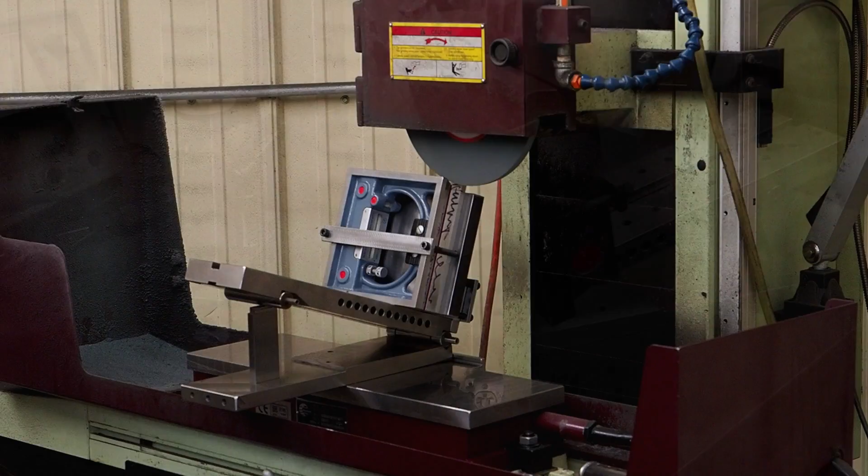Hello everyone, we're back. We're going to be grinding some more on Keith Rucker's column square. This time we're going to do the V's. This will be the tricky part and the harder part.

And before we go there, one of the subscribers, Emerald Machinist I believe it was, asked about the math, how I figured on squaring this block. When we first started with the block, it was out a total indicator reading of about 3 8/10, if I remember right, something like that, out of square. So I'll show the math, and I'm going to use different numbers so that it's easier.

So what we have is a square block, and if you measure from one side to the other, it's out a total of 4 thousandths. That means it's out of square per side 2 thousandths, because you'd split that in half. It's 4 total indicator reading, meaning 2 per side.

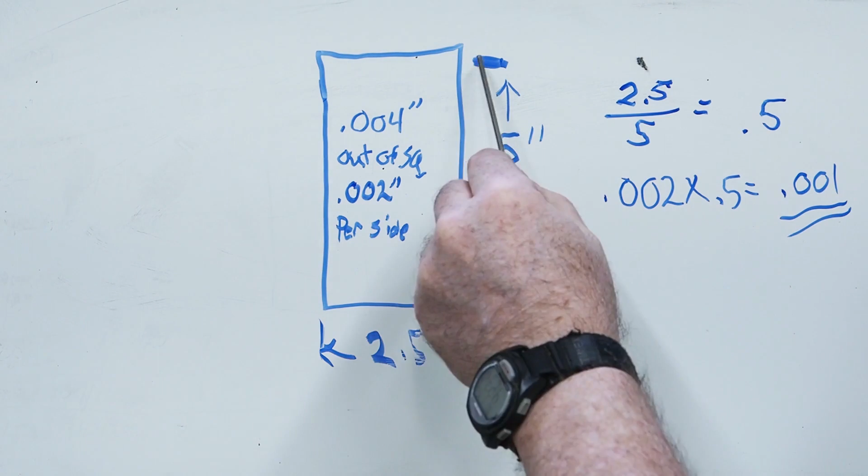What I was measuring was, here's the contact point of the nose radius on the square gauge. Here's the indicator tip, where the distance between the nose and the indicator tip is 5 inches. I'm just using these numbers because they're easier to understand. So even though the block is bigger, we're measuring in 5 inches, and in the 5 inches it's out 2 thousandths per side. Well, the base of this block is 2.5 inches.

So what we need to do is find a ratio. We already know how far out of square. But when we grind a step in here for a shim, how much do we grind off to make a step so that it's square? If your block is leaning this way, it's high on this side, so you need to grind a step over here and cut down, and that way your block can lean back over here. If it's out of square in the other direction, you just put the step the opposite way.

So basically, we want to find the ratio between this side and that side. If I'm 2 thousandths out here to here, I'm not going to be 2 thousandths out here, because this number is not 5 inches. It's half of it. So if I take 2.5, the smaller side, over 5, that equals 0.5. And if I know I'm out 2 thousandths per side, I can take 2 thousandths times the 0.5, and that will equal 1 thousandth.

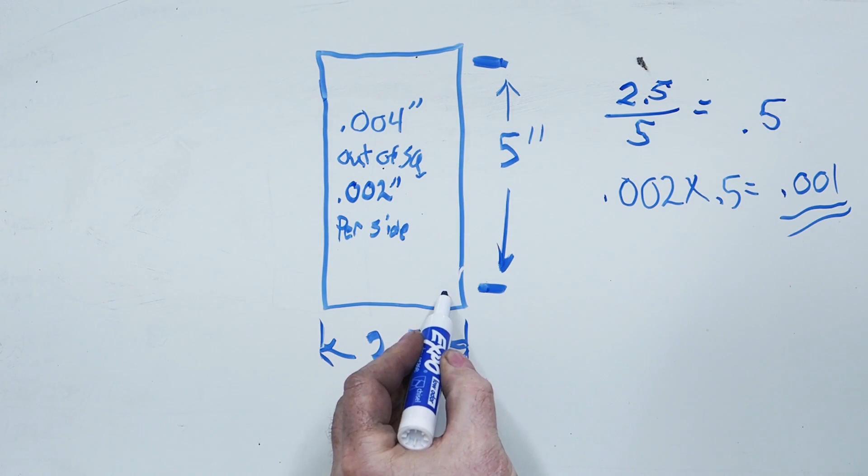So that means I will have to grind a step in this block, and the step amount from here to here would be 1 thousandth of an inch. That would let this block lean back over the 2 thousandths in that 5 inches. And doing the math like this, I can get really close.

Sometimes you have to tweak it in. Sometimes you get really close and it's just not quite there, and you might only have a tenth or two. That's just a matter of setting it up, putting a Dykem mark on there and taking a blank pass on the one side, because you're talking less than 50 millionths sometimes just to get that to move a tenth or two.

And I think it was Brian Block that wrote in the comments that I made this look easy. Well, in actuality, this block was easy because everything just fell in place, and that's unusual. Usually it doesn't do that. I usually have Uncle Murphy visit me, and he makes things difficult.

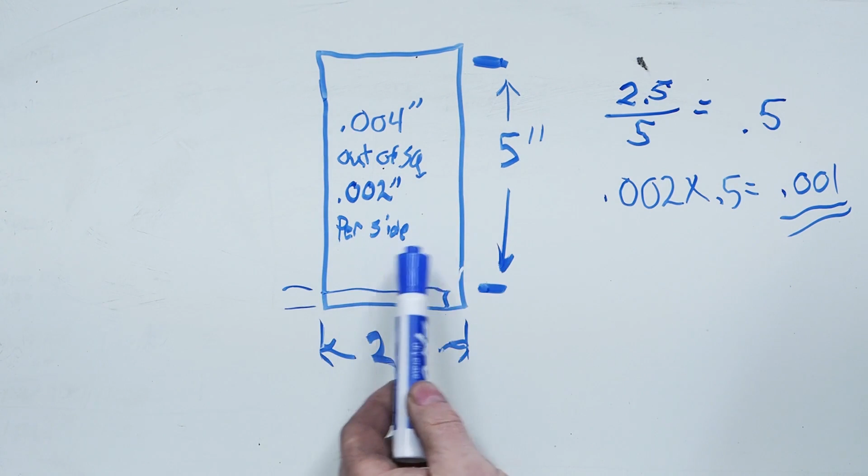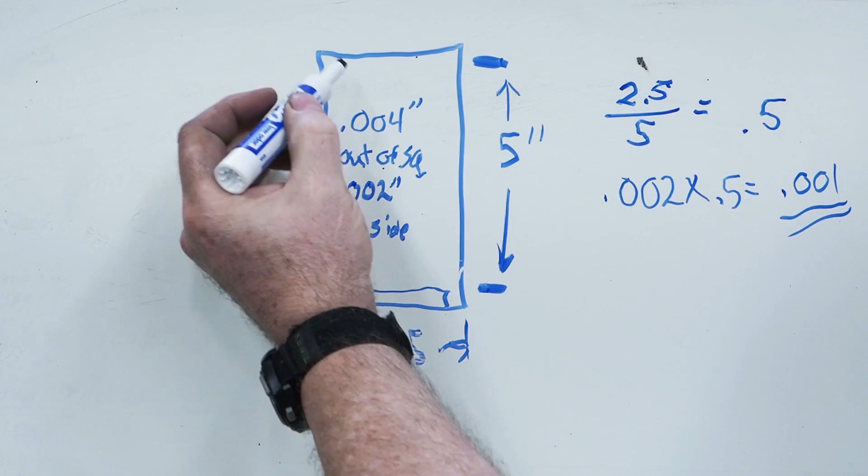For the example I scaled 5 inches, but the block we were measuring from here to here was actually 1.575 inches. I'll just draw it at the top, but we had the V in the block, and even though it was 1.575 in this direction, I had a little flat here and a little flat here, so in reality my step number would have been by the V's if I had been more accurate.

Well, the math I did at the 1.575 came out to where I'd have to grind one side 5.5 ten-thousandths of an inch lower than the other side. That's the way the math worked out, and I only went about 4 to 4.5, and the reason it worked out perfect was because instead of 1.575, I was actually measuring from this edge to that edge, which would have been a smaller number.

And so by chance, it just worked out. The first try, it hit it just about right on the money. So doing the math, you can get really close to what you need when you want to square up a block this way. And what we're going to do, we're going to grind the V's now.

And we're going to use the same wheel. It's a green silicon carbide wheel. It's a Radiac wheel. This one they made that I asked them if they'd make a porous one for me. It's 60 grit. I wanted the porous because I wanted a cool cut on it.

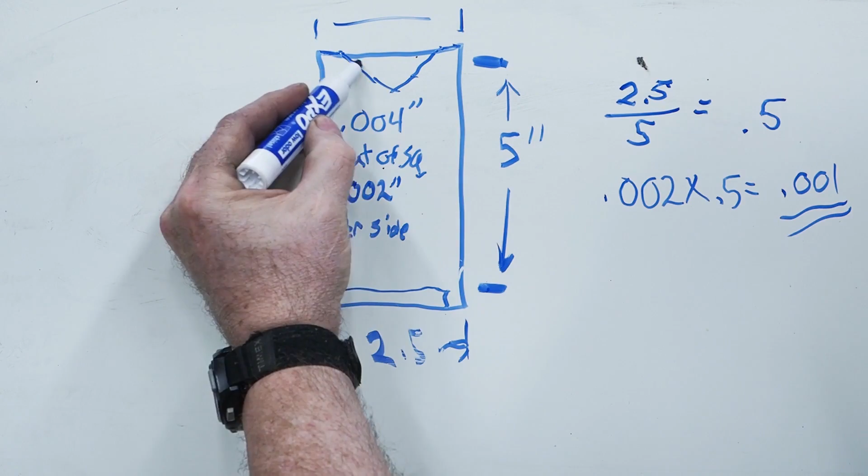And the problem that we're going to have when we have this kicked over and we're grinding this V, if I use the entire width of the wheel, once I turn this up, the wheel would be in like this. If I use the entire width of that wheel, I'm going to have a huge heat signature. If I would come in from this way and grind in, what's going to happen? My wheel's going to wear down right over here, so the V will be near impossible to get flat.

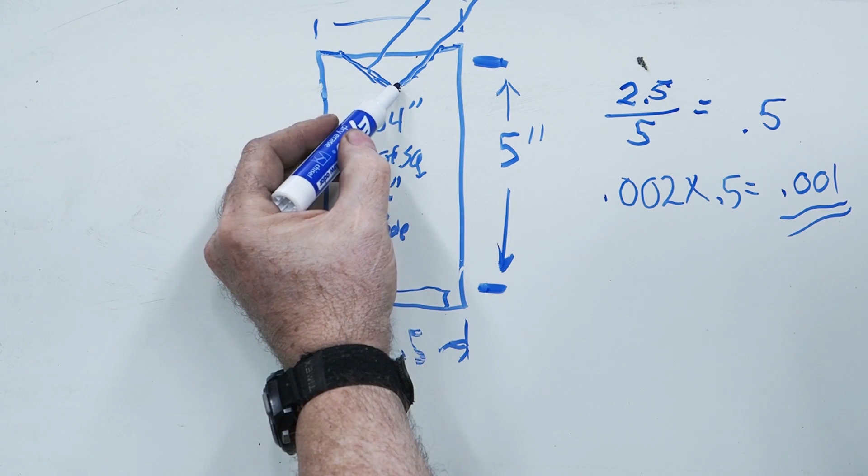So I'd like to come in, plunge down, and walk out. By doing so, my wear is this way, but I can come all the way off, and so the lowest point of the wheel is from the bottom all the way to the top. The problem I'm going to have with that half-inch thick wheel, again, we got a huge heat signature there. And not only that, I can't angle this on the magnet like I've done the other to make the engagement less, because I'd be hitting into these other sides.

So what we're going to do with the wheel, we're going to do a little trick. If you have your wheel, I'll just draw it so it's like this. And instead of using the full half-inch to grind that V, and let's say that we got our V set up like that. What I'm going to do is I'm going to relieve about half of this wheel. I'm going to cut this like so. Oops. Kind of hard to draw like this.

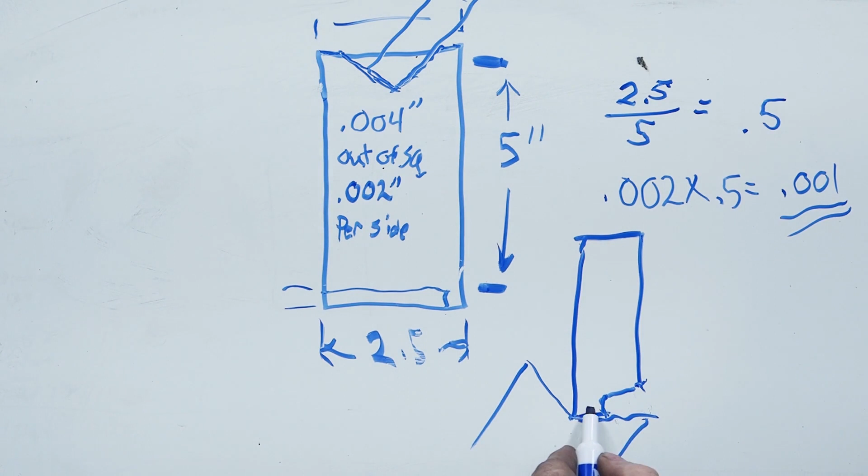So I'm going to relieve this wheel. I'm going to start out with just about half the wheel, or a little bit less. I'll start that way so that my heat signature is going to be way less as I come across. And by taking it easy, it should work out fine. Right now we're going to go to the granite table, and we're going to show you the setup that I'm going to use to grind those V's.

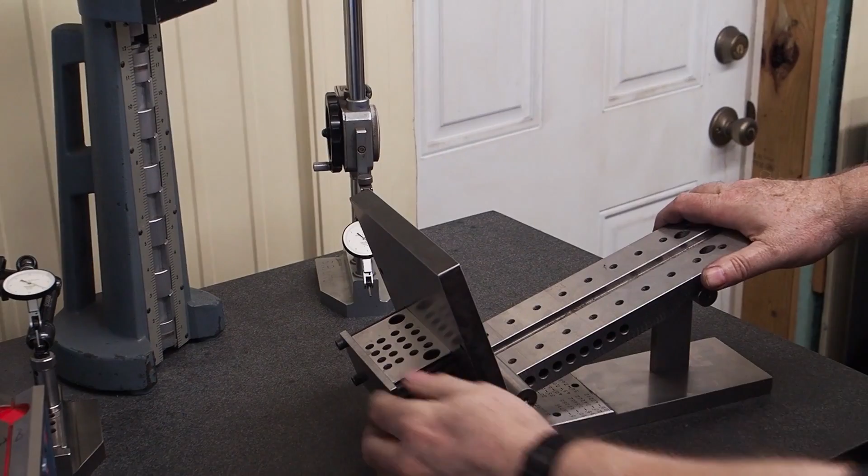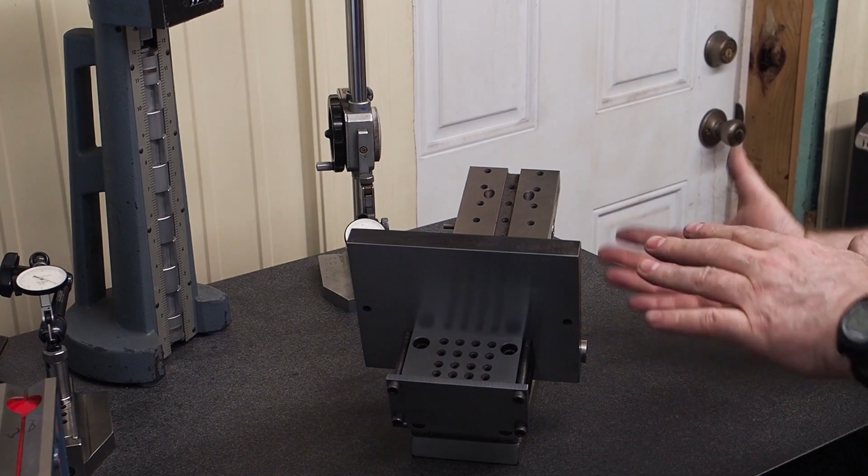Okay, here's the setup that I'm going to use. I'm going to be using this sine plate. It's 10 inches from center to center. I just retouched this not too long ago and got it really good and accurate. The problem that you have when you start working with an angle and you start lifting things up, your error gets magnified sometimes when you're doing this type of work. And so you got to take a couple extra steps if you want that extreme accuracy.

The other thing I had to do was that this base that I have for the sine plate right here, it wasn't going to be big enough. It wasn't long enough. It wasn't tall enough to actually cover most of this right here. And so I could have probably put that on there and tried to toe clamp, but there's no support up here. And then if I start grinding on the V, I can get harmonics because it's just not a rigid setup.

So I took a piece of cold rolled steel and I stress relieved it by throwing it in that oven that we got from Stan at Bar Z. I threw it in there between 1100 and 1200 degrees for about 4 hours, and then the oven would turn off automatically, and then I would just let it set overnight until it was completely cool the next day. So these surfaces, they were milled, but because of the heat and everything, I don't need those surfaces. I just needed it flat here, and this whole plate was flat, less than a 1/10,000th of an inch.

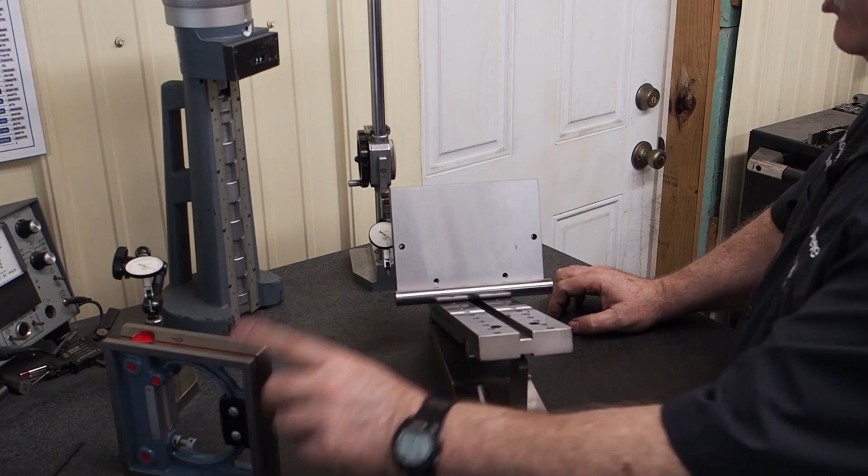The block that I have on the back, when I put just this pin, it's a very precision ground, very round, very true pin. When I would put that in there, it was 2/10 low, checking from one side to the other, which is actually quite accurate in 7 inches.

And so what I did with this plate, I got 4 screws that will hold this plate on to that block, and in the middle I put a jack screw for 1/4-20, and this was the side that was low. So I got the plate snugged on there pretty good, not reefed down real tight, but real nice and snug. And I put a set screw in there.

And then what I did is I adjusted the tension and everything so that I can get this pin so it reads over here. From my angle, it looks like we're reading right at 0. And it looks like we got it right on the money over here. It's at 0. So we eliminated that 2/10,000ths of an error.

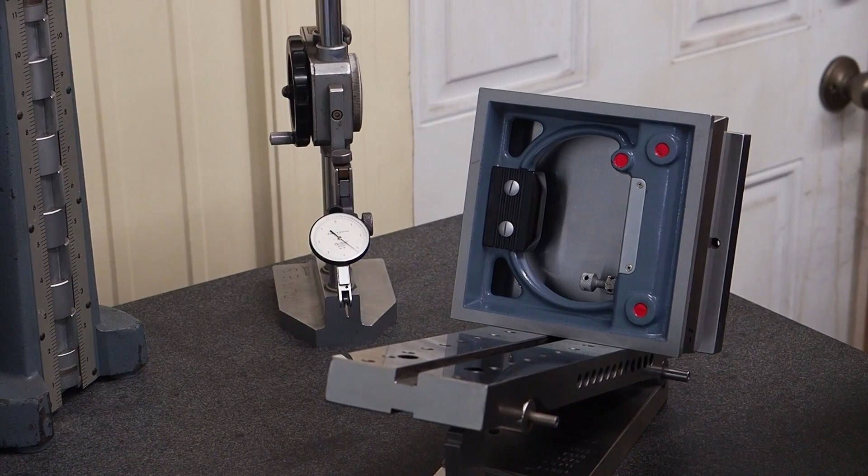And the reason you want to eliminate that is because if you go to grind, you have your part on here, and you're low on this side, 2/10, high over here. When you turn this over, you're going to be low here and high here, just the opposite. And so what will happen is the plane that you're grinding right here is off 2/10. It's just the opposite on the other side, and it will cause some error.

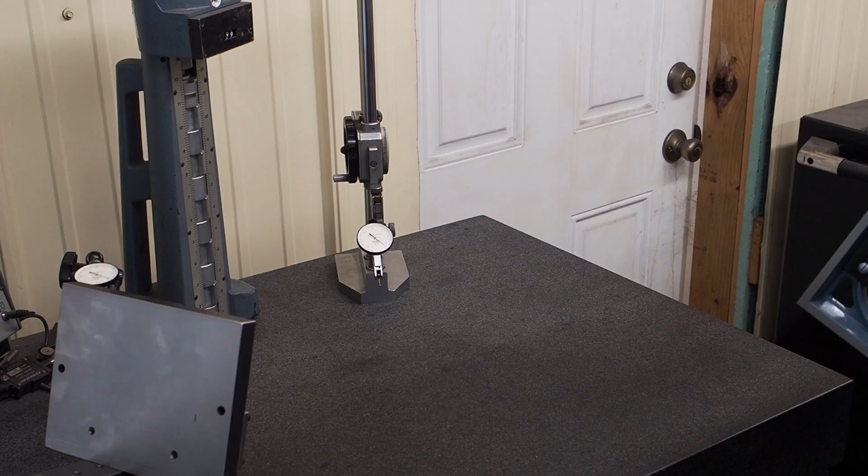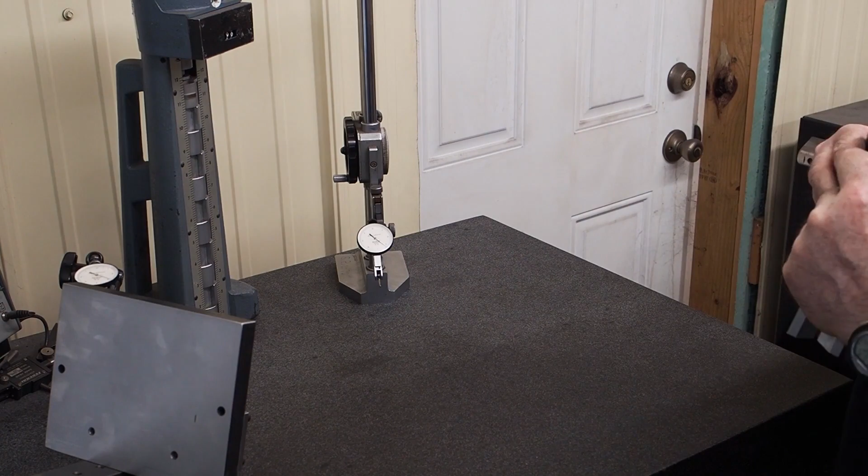And so this is why you want to get that planed in. If you're doing V-blocks or anything with angles, you want to get those 2 planes that you're working from. You want them to line up as best you can get them. Let me see if I can find, yeah, here it is. And I mapped this out a little bit off camera, and I just want to show you guys some of the error that we have.

And it looks like we got a big old fly visiting us. Might have to take care of him off camera here in a little bit. Photo bombing us.

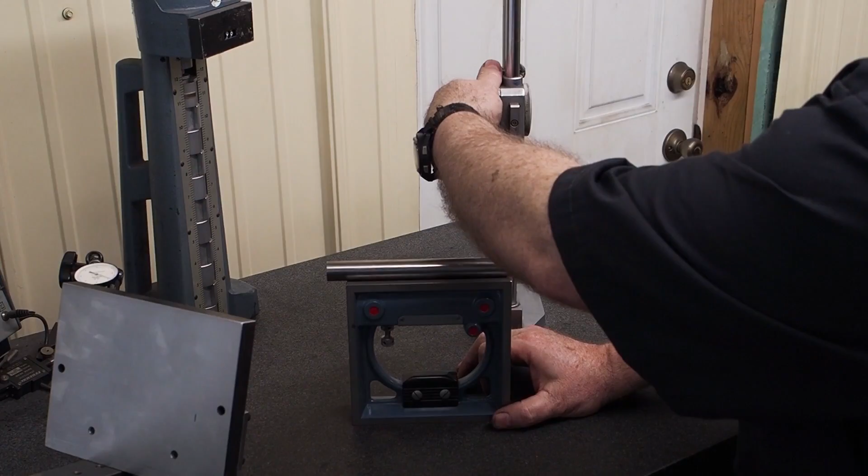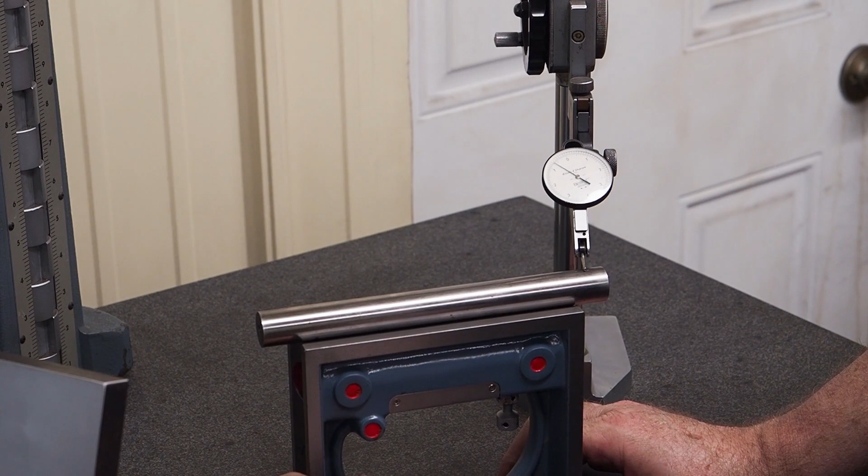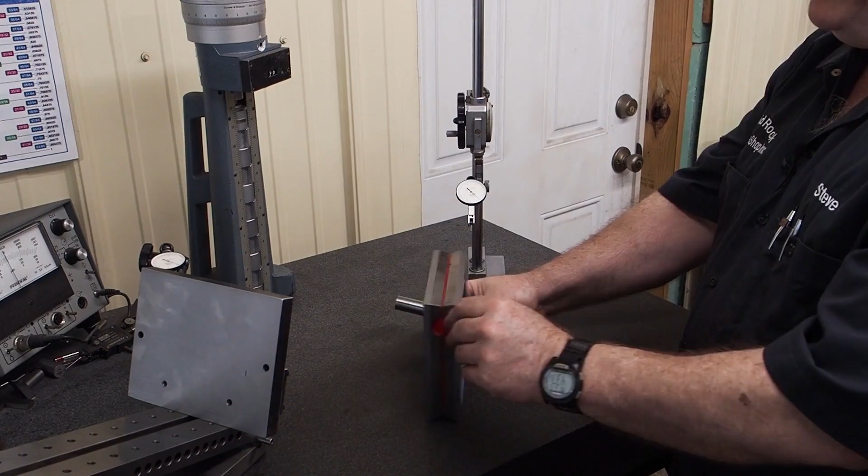If you look at this V, we're right at 0. And we're about 1/10 high. So you're going to think that V is nice and square because it's reading right on. The problem that you'll find is that when I actually map this out, it was the error I was just talking about. From this side to this side's 1/1000th low. From this side to this side, it's 1/1000th low.

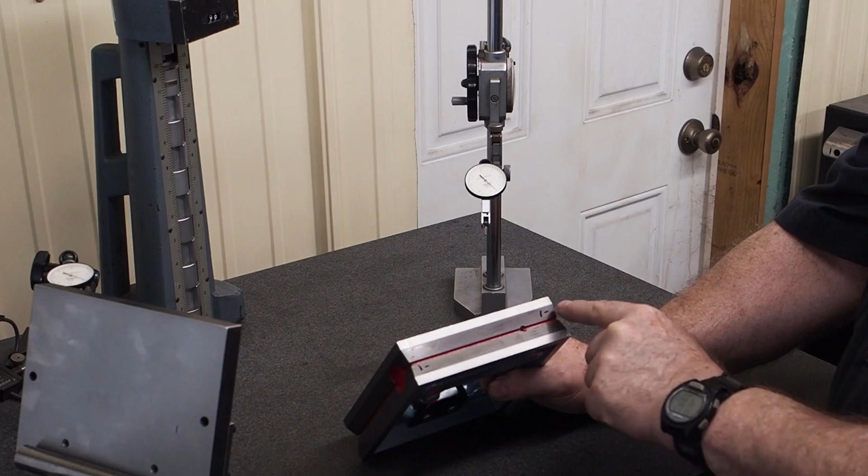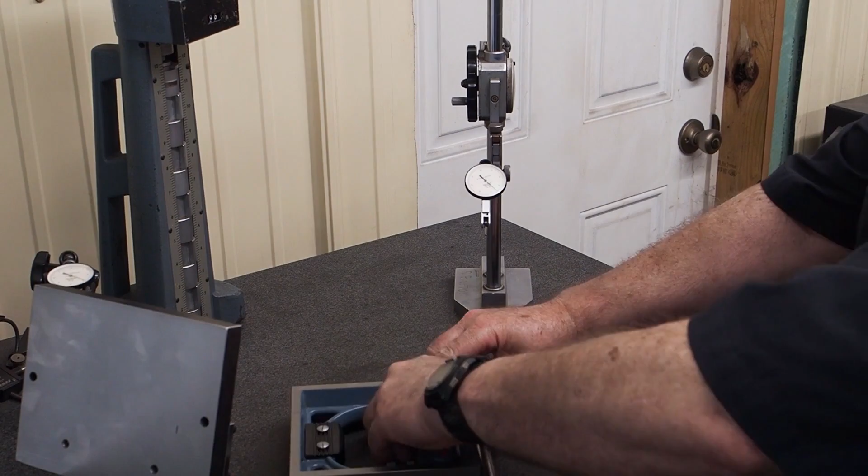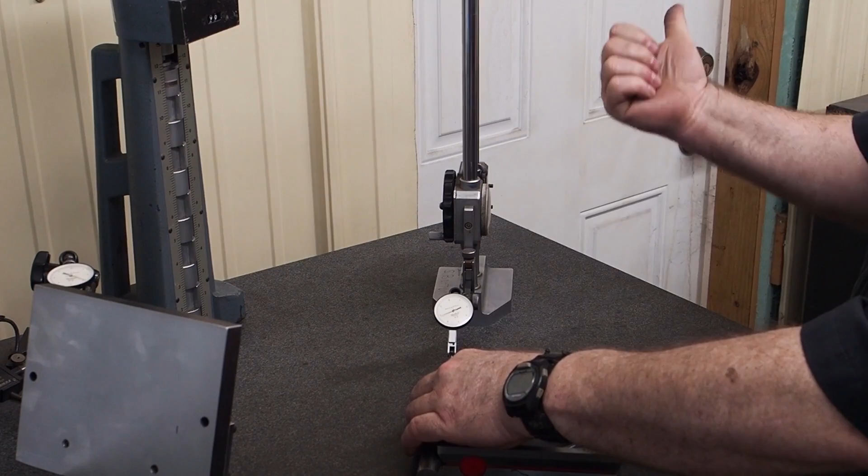And so what will happen, even though it was square in the one direction, if you would set it up in this direction, and let me see if I can do this without getting my hands too much in the way, and it's always kind of hard holding the V like this, so we'll see if we can get a decent reading, or at least one close enough. See if you can slide it while you're set up back that way. Back? Yeah. That's good. Okay. So we'll get position for the camera the best we can.

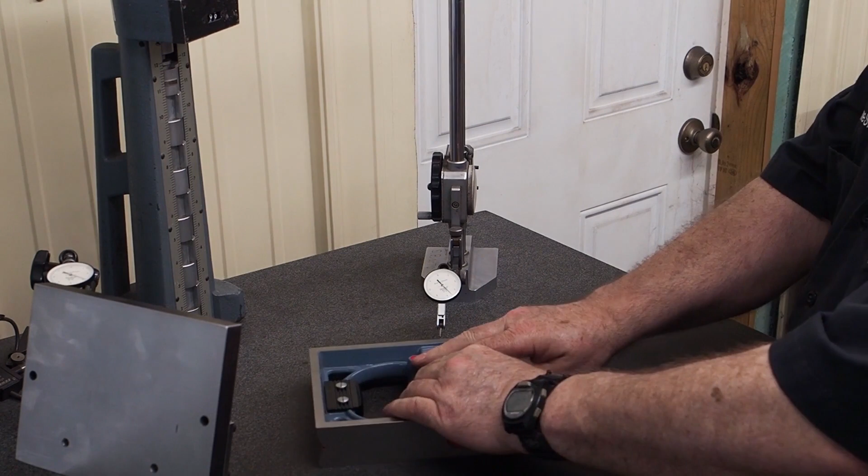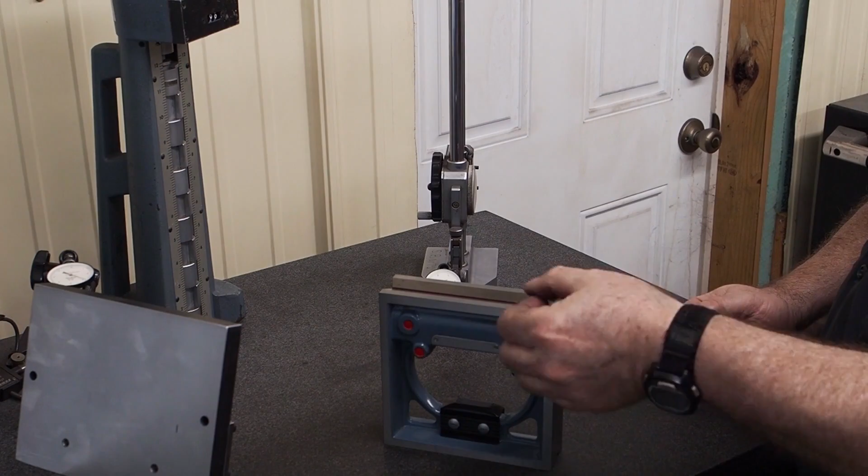So you can see we're about 1/10 high. And now you can see we're about 1.5 out. So it's square in this direction, but those planes are not going the same, and so that can cause all kinds of other problems as well. But it shows that in the one direction it is out. So we want these planes to be as close as we can for accuracy.

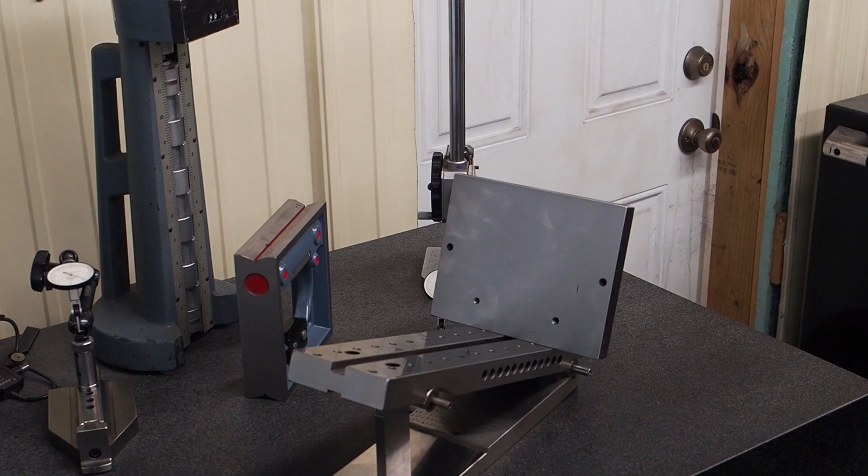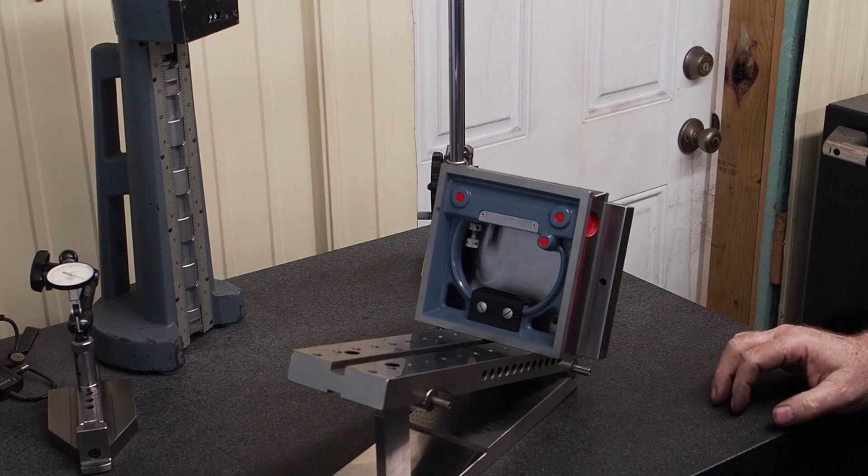Now, the next thing that we have on this is when I set this up to find out what kind of angle we had, I thought it was 15 degrees because I have a 15-degree template. I set it in there, and yeah, that's 15 degrees. It looks pretty good. When I started setting this sine plate up at 15 degrees, I noticed that I was way off when I was measuring in this direction. And you can see I'm off here.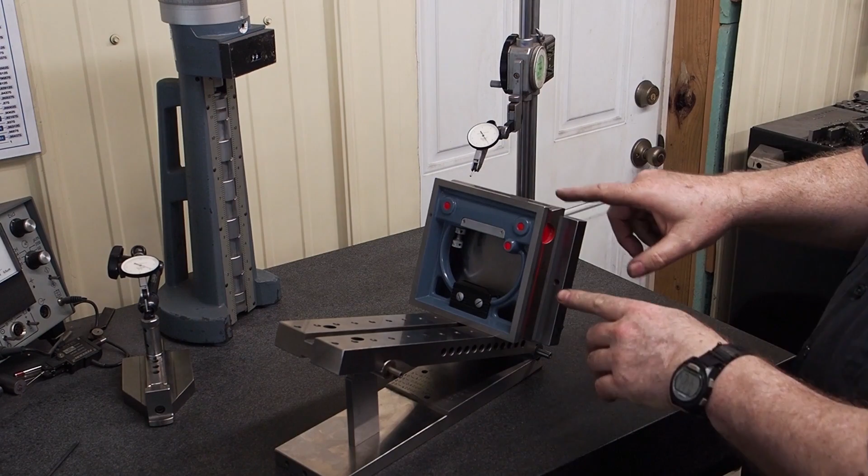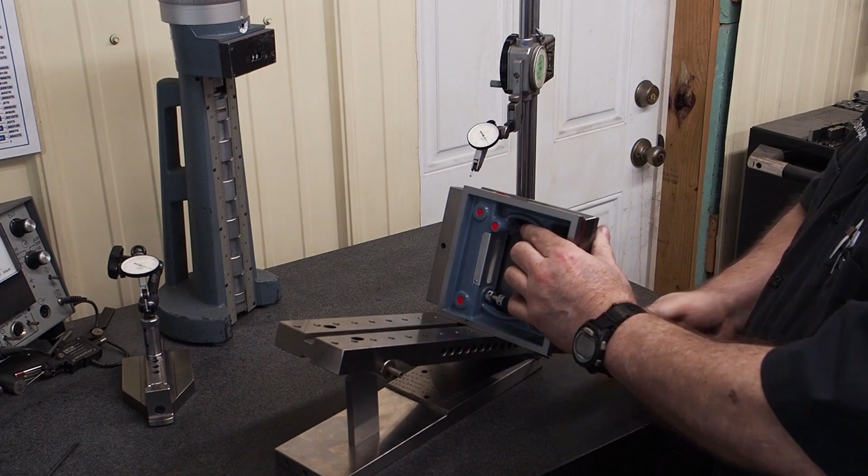But the thing that I found out is that this V was off. None of these V's are the same. They're all off. And they were not 15 degrees. The closest to a nominal degree I could get was 19 degrees. So here you can see this one here is pretty close. It's a little bit higher, but you can see that's pretty good. And that was the V that I figured I'd start working with.

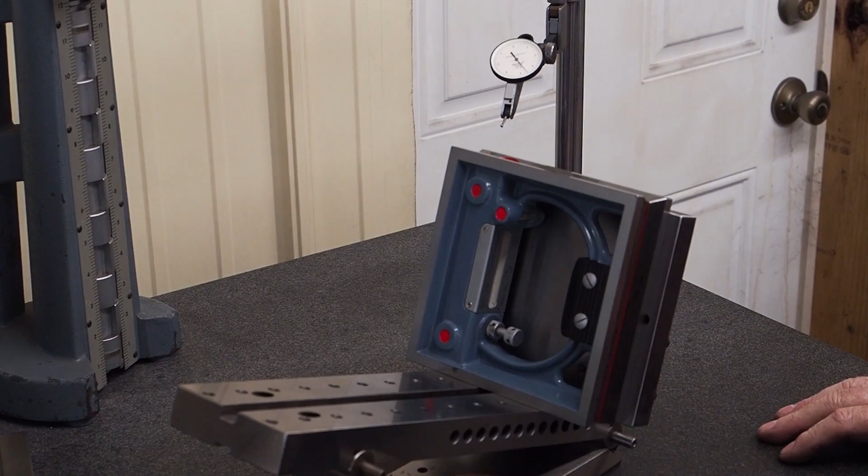So anyhow, what I did is I just kept playing with my gauge blocks until I got the one side very close. The other sides are close, but I think that worst side was what you just saw, about a thou out. It turns out that by doing the math, the actual angle that this is set up on is 18 7/8 degrees.

So I have no idea what the original setup or what it's supposed to be, but I'm just going to copy what they have in here the best I can. And so, Keith, if you want to know what degree that is, write it down. It'll be 18 7/8 degree.

And so what we'll do is I'll get this strapped up. And we got a strap where I can pop this in there and hold this on so we can grind this. I got to change the wheel out. Actually, I got the wheel on. I got to actually get the grinder going and get the wheel dressed and get our setup. And then what we'll do is we'll come back and we'll start our grinding.

Okay, I got this set up right now. You're not going to be able to see the grind because it's going to be blocked. I'm real close. I haven't touched off yet. But what I did is I got to where that relief is in the middle, and I came back as far as I could without touching the other side. And here's the beauty of having a digital on the Y. I set that to 0, so I know where to stop on that. And so right now I just got to lightly touch in, and we'll take our first cut.

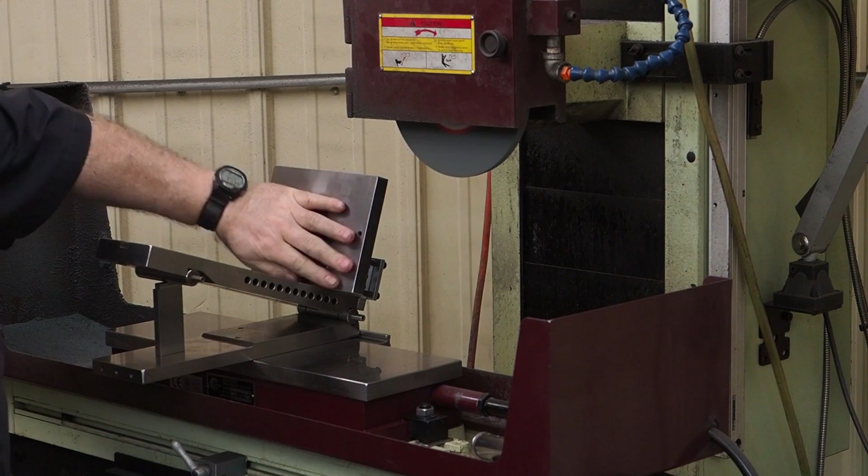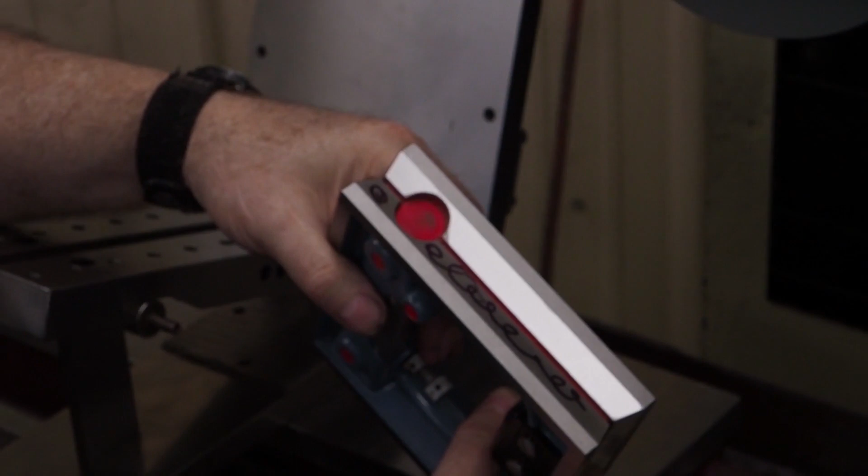What I'm going to do is I'm going to wipe everything down, get all the grit, and if Adam can get up in here, you can see I had it inked up like that, and it only took a couple tenths and it cleaned up. We got a very nice finish. Can you see that from there, Adam? Okay. How's that? It's hard to tell. Okay, well, it's kind of hard to get it with the light here, but you got the idea.

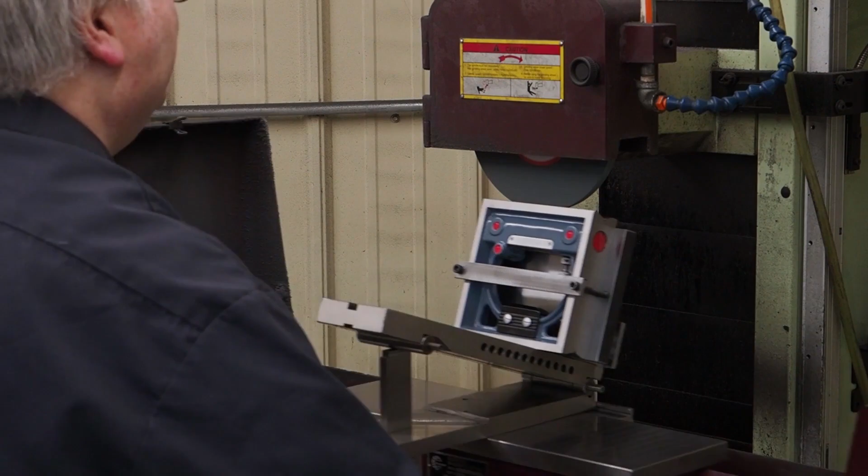Come back to 0 on the Y. I'm just going to ease in because I didn't check to see if that was central, which I'm assuming that it is. Now that's usually when things come back at you, you assume things that aren't right. At my age, I really ought to not assume things. Really should expect actually the worst. In this case, it looked like it worked out. So now I'm going to ease down.

We had one viewer that requested that we show a picture in the picture of me actually winding the handles as well. I know some guys don't like that, but we're going to do that. I think what he wants to see is the actual feed. A lot of times when I'm traversing in the Y, I don't even think about it, and they ask what kind of step over I'm taking. Well, this Y is 100 thousandths per revolution, and I usually try from here to here to go about half or about 1/4 of a crank, so 25 thousandths to 35 thousandths. I'll do that on my finish.

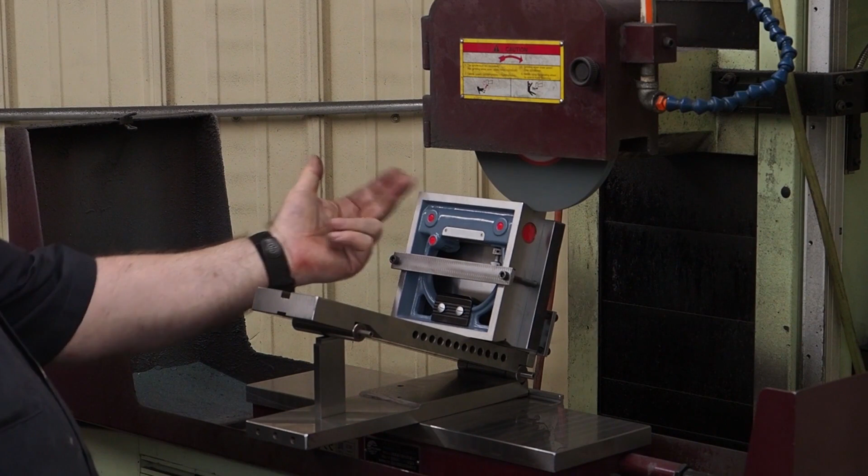And now we're cleaning up, and we're heavy on the one end, and we're low on this side. So I'm not going to bring this V central in there. I could do that, but it's just going to be extra work and extra grind, and I can't see that there would be a reason for that. So we're just going to get them so that both of these planes are winding good.

And going back to the step over, people ask what kind of step over you're taking. A lot of times when I'm flat grinding, I have a continuous movement on the dial. It helps with the finish, but it would equate to 25 to 30 thousandths in per pass on there. But I keep it a continuous movement. A lot of times I get asked these questions, and I got to think about it because I don't even pay attention to what I'm doing. It's automatic.

So we're coming back with a blank pass. And we'll just pull this off after this and check and see where we're at. There we go. Okay, because when I flip this 180, I rotate it 90, so I actually got two of the V's ground right now. And we'll check them out. You can see in this direction, we're right at 0. And here we're less than 1/10, roughly 75 millionths, the best I can tell from my angle. And it's going to be really hard to get closer than that.

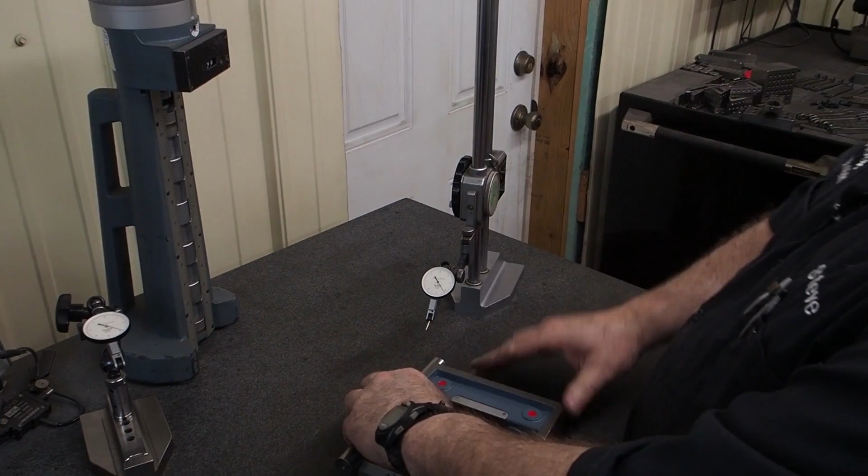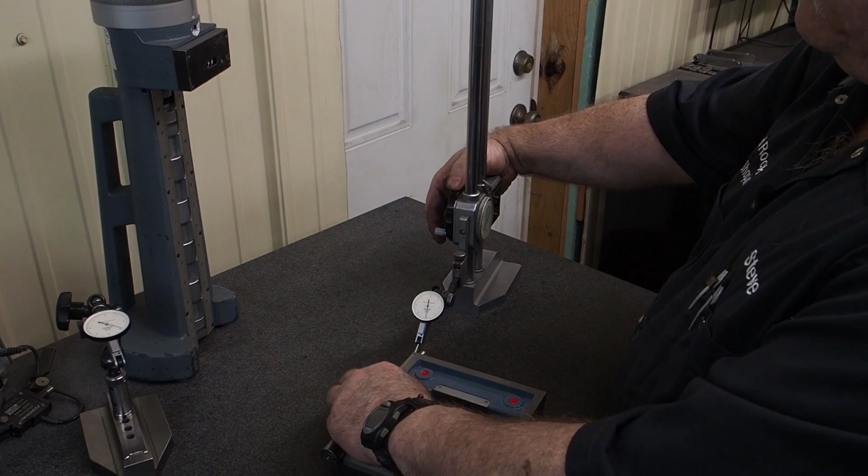The other side was identical. What we're going to do is set this down. I haven't checked this yet. Let's just see how straight it came out in this direction now. If it come out straight in this direction, that means I only have one more side to go, and then it'll be ready to ship to Keith. And see, it's real hard to get this just perfect here. And I'll show you why once we check the side.

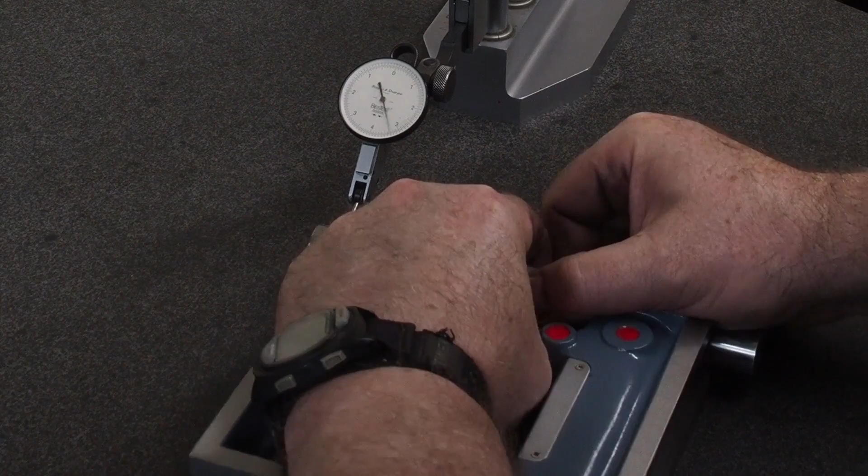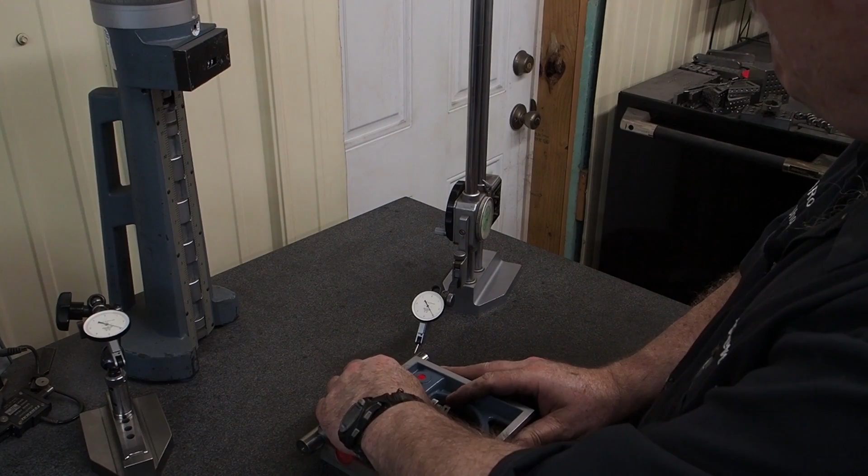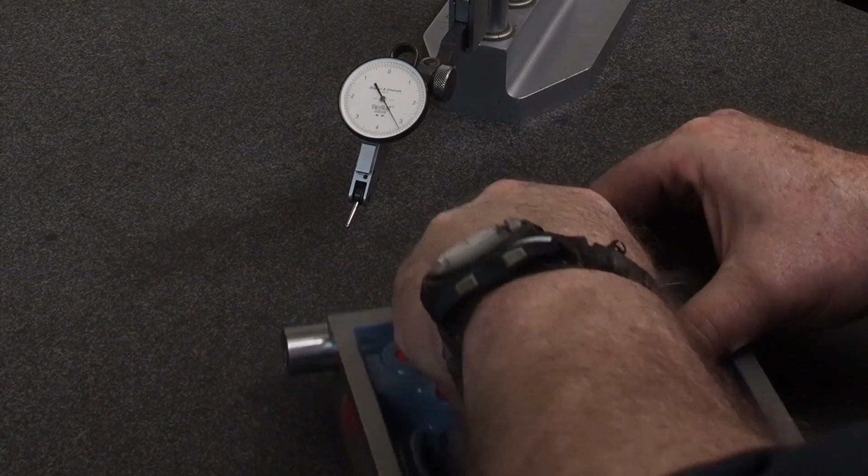So we're at the high point. We're just about 50 millionths high. And it looks like we're almost perfect there. I said I wasn't going to worry about getting these central. I don't see that there'd be a real need for that, just as long as they're square. So we're sitting right at about 0. And this one's off a little bit. This is okay. I'm going to check the other side again, but we're about +4 to 5.

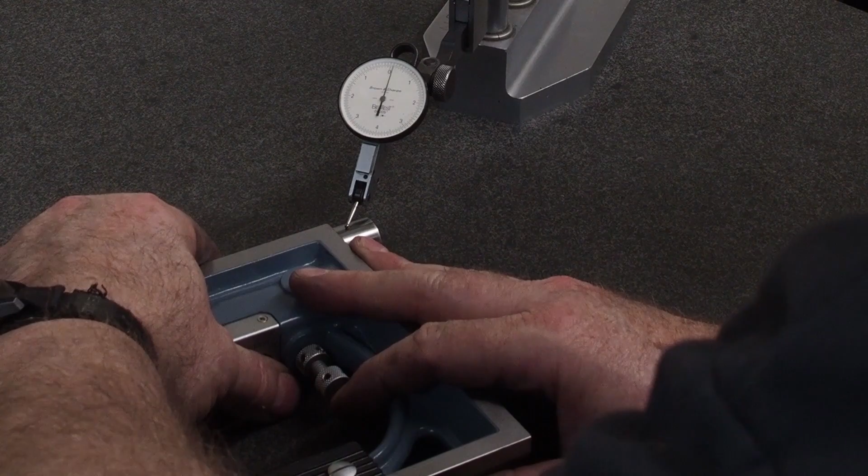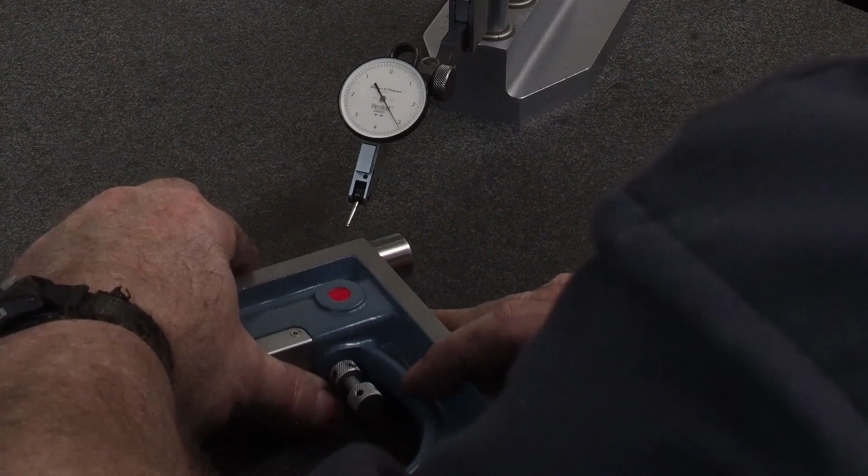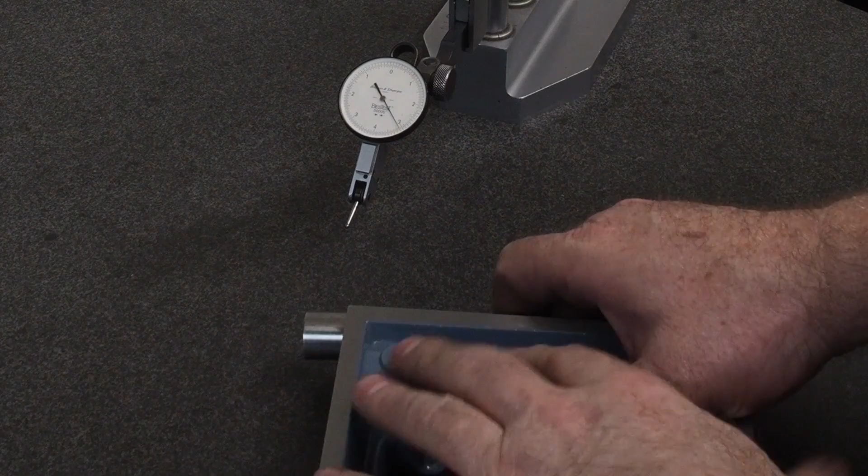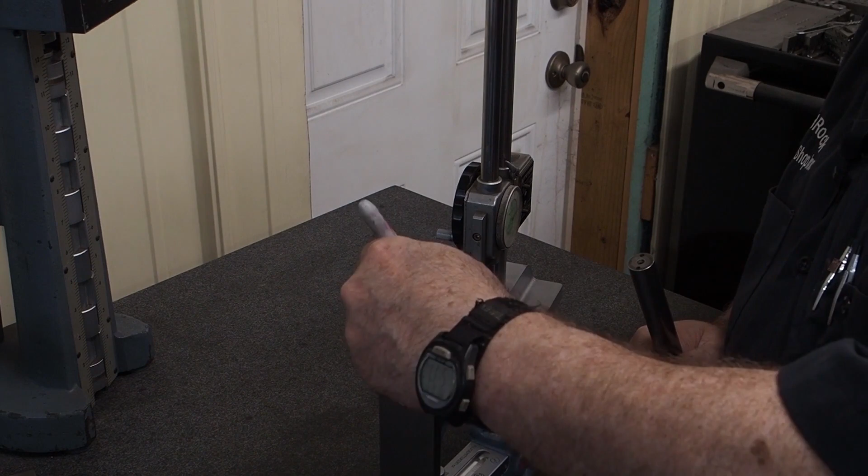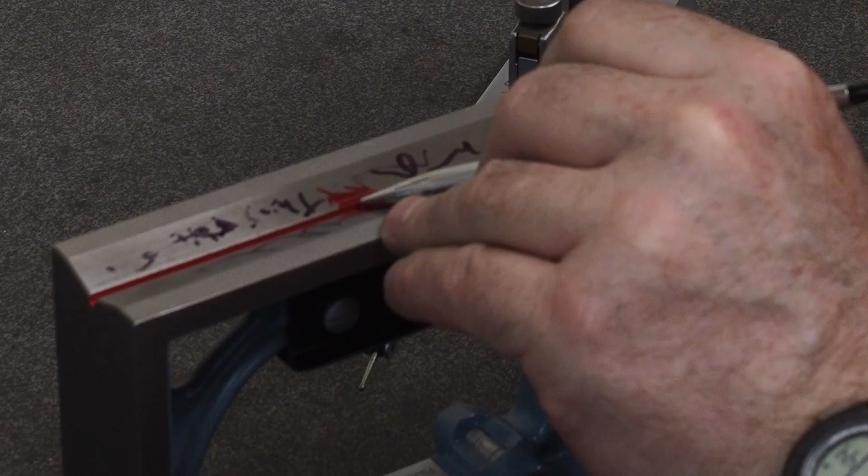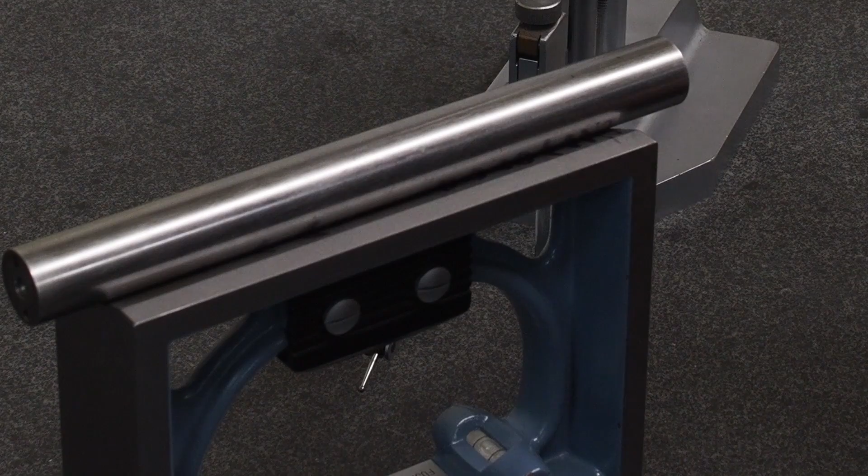Now I don't know if you can see it or not, but our contact on that angle is only less than 1/8 of an inch from this edge up. So we're not checking way up, we're checking pretty close. So it's kind of hard to hold the pin in there with that small of an angle. You got 18 degrees, and at that tangent point, it's really hard to keep that pin from rolling, just holding it by your hands. But it is square, the direction that we want it.

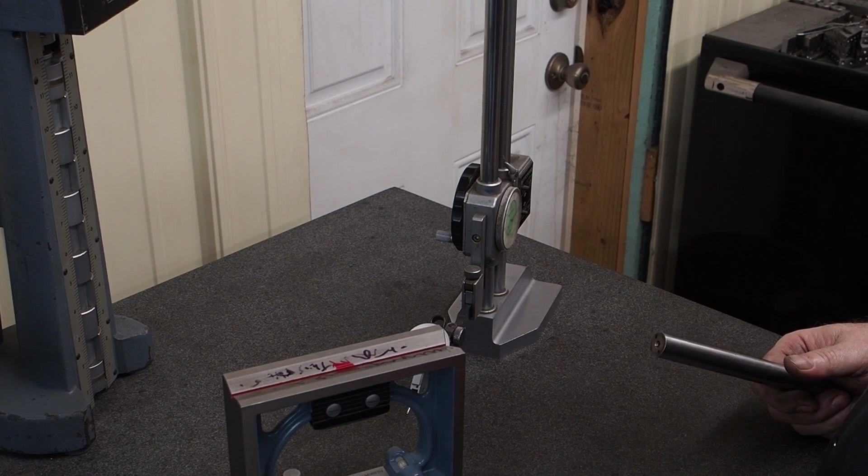It's close enough that way. It's almost perfect on one side, within about 4/10 on the other side. I'm going to grind this third side out, and then we're going to check it, see where it's at from there. And if it checks out and it's as good or better than the worst side there, we're going to call it a keeper.

Grinding your V's and getting them just perfect is really hard to do. You're working in different planes than just a regular top and bottom grind and regular squaring. The angle that you're working in makes a big difference as far as how accurate you can get on these things as well, because like I say, when you turn things up at an angle, everything gets compounded.

And, oops. And I'm not reefing anything down. I'm just getting her down snug enough that I know it's not going to move, because I don't want to distort anything.

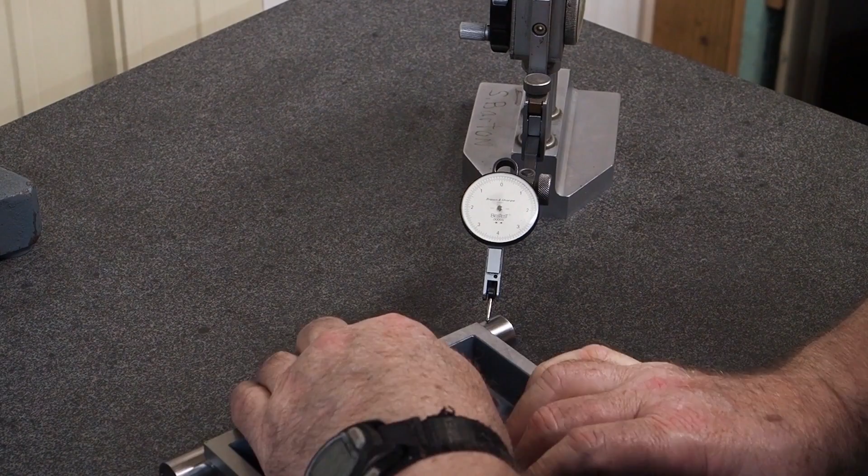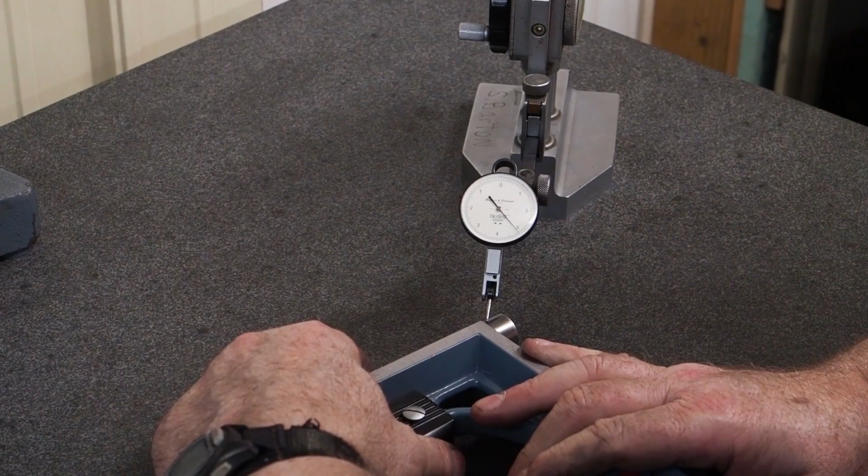Okay, here's the last side that we've ground. And we are setting at +3. And 0. And again, that direction I'm not as concerned about. We were quite a ways out on that. What I'm more concerned about is how square it is going to be this way.

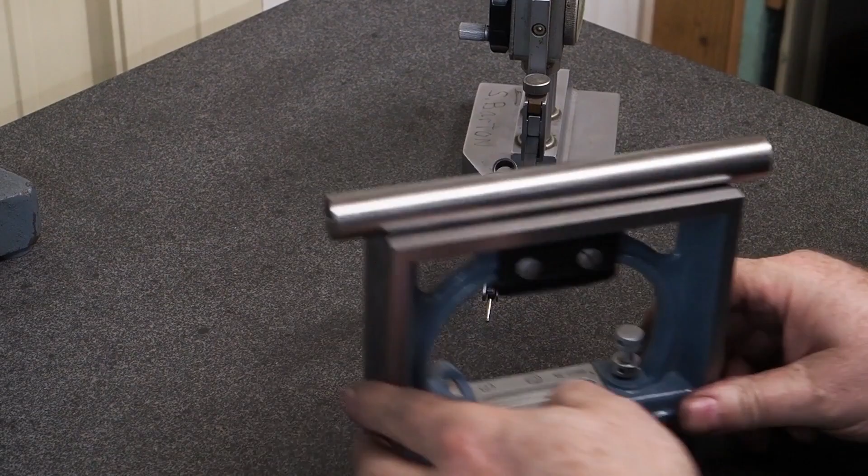Yeah, that 3/10 side to side, that is really hard to get out. You can do it, but you just got to play with it, tweak things in. If you got just the littlest tiny piece of dust or ding on there, it gets magnified when you turn from one side to the other.

So now let's see. Okay, just trying to get it perfect. Yeah, I'm probably not going to get it. It's about minus 25 millionths. And here we're about minus 2.5 tenths. So let's check the other sides out again. We may have to try to touch that one up a little bit.

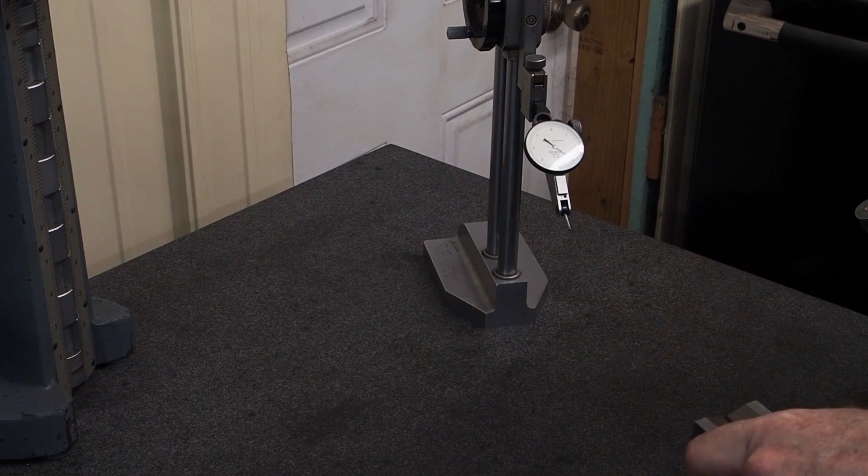And actually, I'll have to check the bar because I probably didn't wipe it down good. I'll have to check that side again. So here we're plus almost 1.5. And now we're within 75 millionths on this side. So this side we're not going to touch. So I'm going to go ahead and mark it.

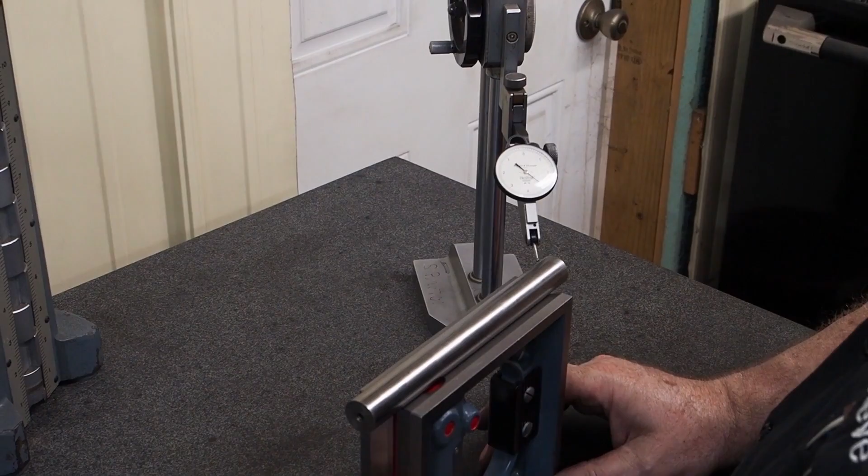And I wasn't trying to bring these to the same size either. I'm just trying to get them cleaned up. There we're at about almost minus 50 millionths. And that is almost identical. I mean, that's about minus 50 millionths. So this side is good.

Now I'm going to flip it back over to the one side that I measured out, because it may have been the fact that maybe I didn't have that bar cleaned off good. I could have had a little grit on the table, a little dust. There's a lot of things that can take place. It could be in the setup.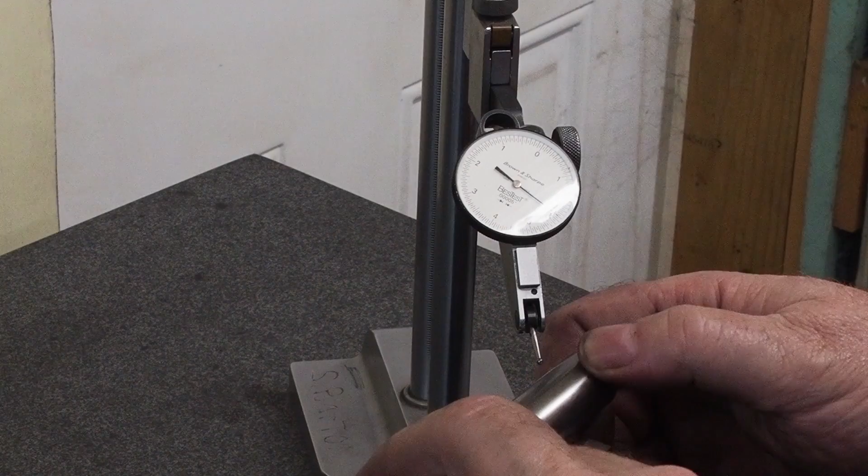But when you're setting this up, you can rub this bar in here like that just to get it to seat good. Kind of roll it and go back and forth, and that way if there's any particles under there, there's a good chance that you'll get them to move out.

We're just about plus 50 millionths. Oh yeah, see we had a little bit of particles in there. Right now it's reading within 50 millionths. So anytime you get a reading that just seems kind of strange and the other sides come out, always go back, clean things off, check it out, because you're probably right on.

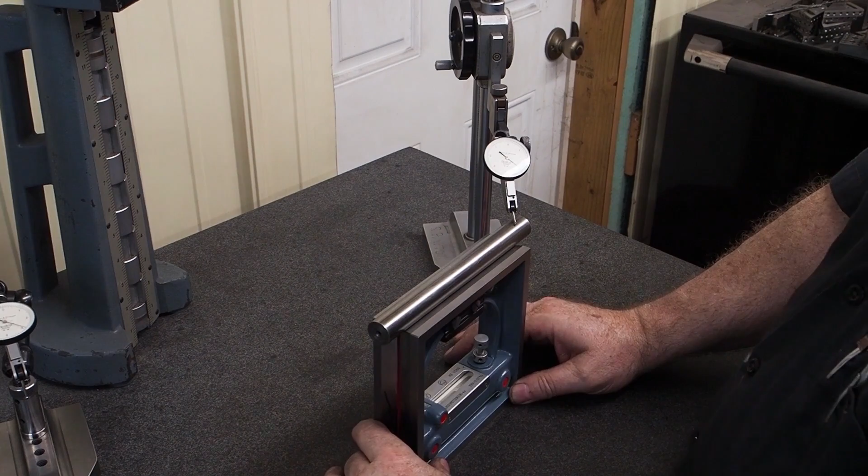And I mean, I could have had a small particle under this surface. I could have had some small particles under that surface. And when you're dealing with V's especially, you're working off the tangent point of this diameter, and you got to roll that. If there's any dust, any speck of particle that's in between that tangent point and your pin, it's going to throw you out.

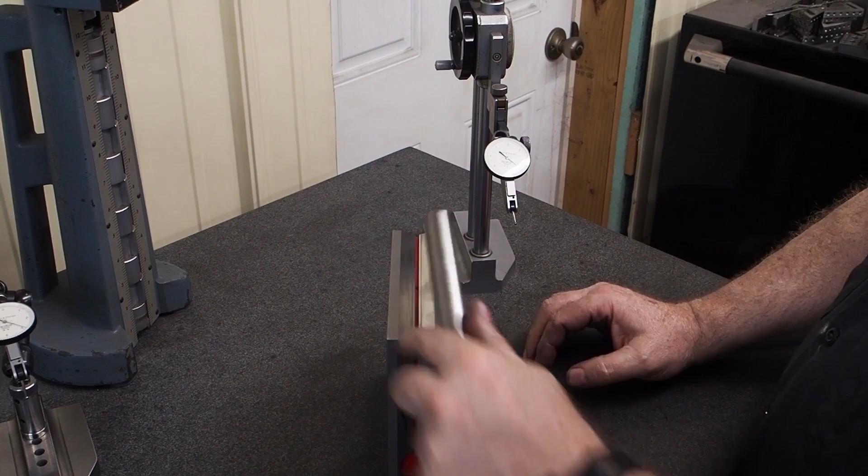So anyways, we're going to call this good. About the farthest out we are on one side is about 4/10 total. And on the other side, I think one was just about right on, and one side was within a couple tenths. But again, that I'm not too concerned about. What I'm concerned about was in this direction here.

And it looks like Keith now has an extremely fine-tuned column square. It's probably one of the most accurate ones in the country. And this level here is adjustable. I'm going to let him take care of getting that adjusted the way he wants. He's more skilled at that than I am.

But this is just a really nice tool. And what a generous gift that one of his subscribers made to him. I mean, that was awesome. And I don't know what something like this would cost, but I can see in Keith's line of work where this thing would come in so handy. It'd be a great tool to have.

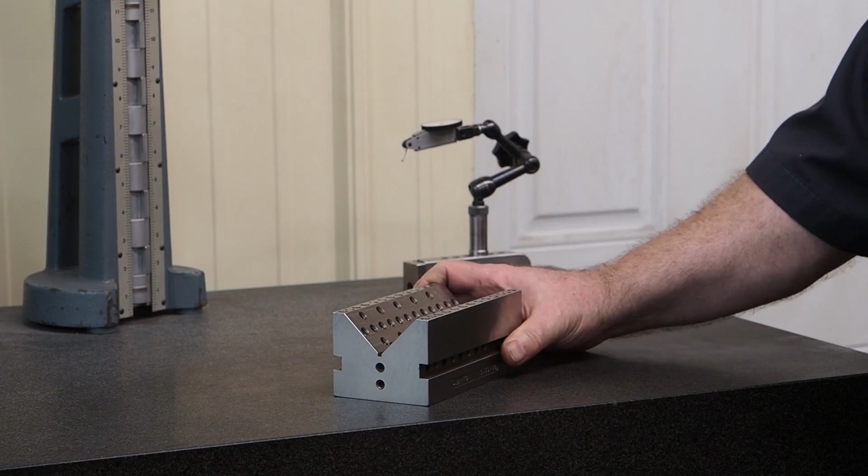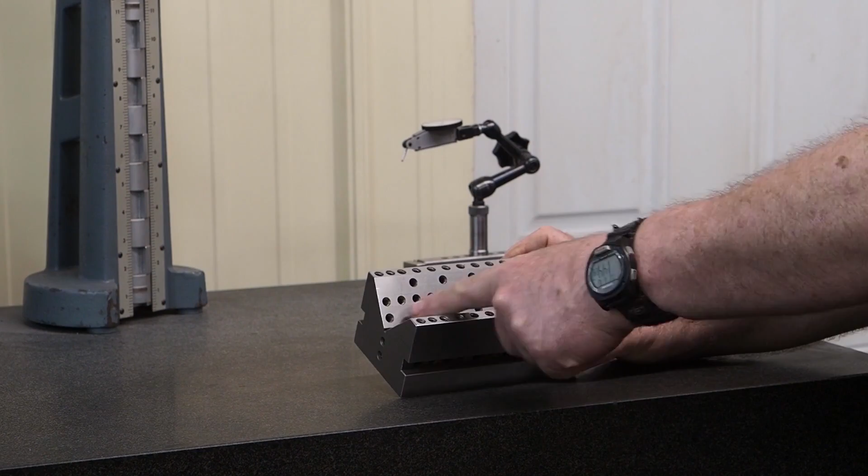This is a V-block that I've made years ago. It's my favorite V-block. This one is extremely accurate. But it has holes in the V area. It has four tapped holes in here for strapping. You got a couple tapped holes here for stops.

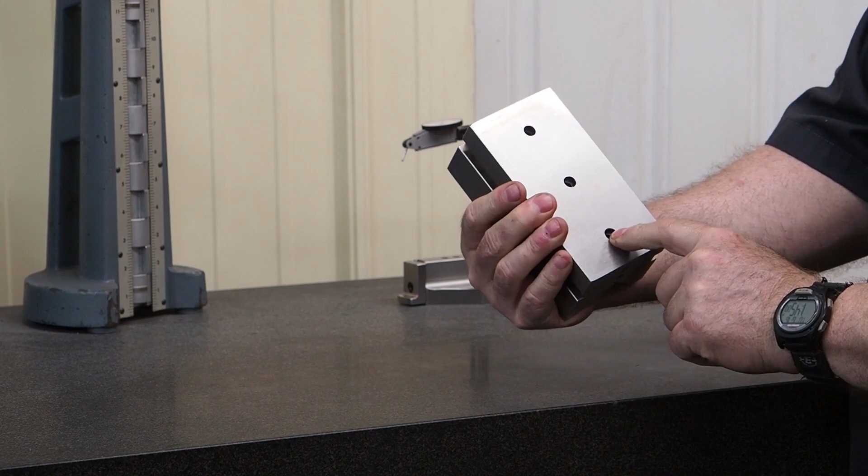You also got some 9/32 holes and some tapped holes on the side over here so that you can even bolt things up to the side. And you have some 9/32 clearance holes for 1/4-20 with counterbores on that side, so you can bolt this to other objects, and then it's actually counterbored on this other side as well. This V-block is my favorite one. It comes in handy. I use it for a lot of stuff.

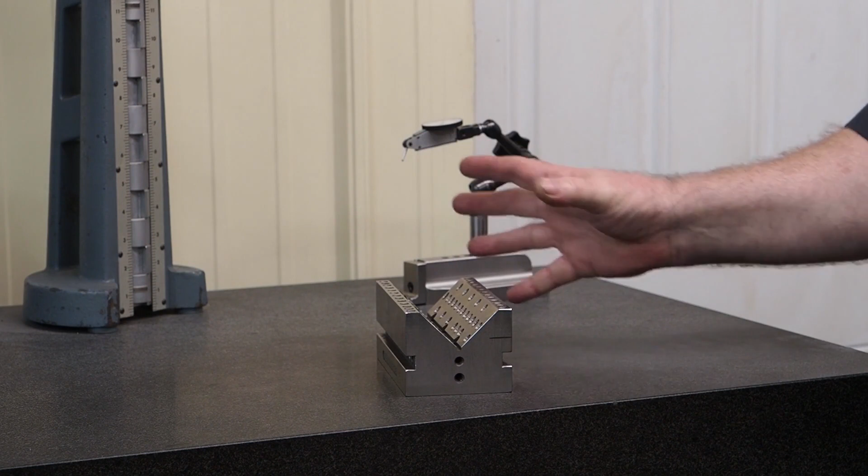One of the nice features about this is because that V in here is extremely accurate. I use this a lot when I grind my smaller V-blocks. I'll set them in over like so, and then I can actually work with clamps and stuff in here, and I can get this part clamped down, and then I can grind the V, flip it over, grind the V, and what's nice about this, it makes grinding these other V-blocks a piece of cake, because if the block is square, it's established, and grinding this V within this V, it's automatically central and everything, and it comes out good.

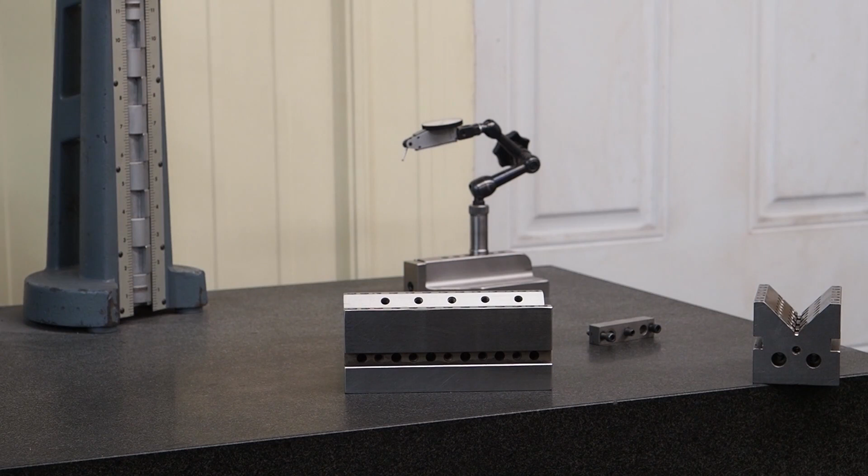But if I need something where I just need to stick in there, let me grab another piece here. One of the videos I got a block like this. I need a nice 45 on there, so I could just set this down in here, finger clamp that, and now I got a nice 45. So it just comes in handy for so many things, and you will see it a lot in a lot of our previous videos.

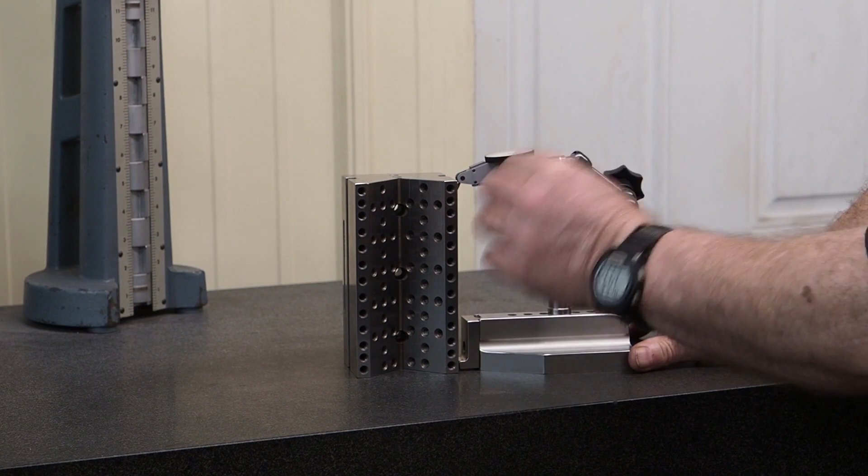Another thing that we got going is you've seen our squareness checker. This one here is a non-adjustable one. You can check, as you've seen in the video, the squareness of objects. The Noga base has no adjusting on there. I like it stiff like this, so it does make it a little more difficult to get your needle. You got to fudge around a little bit to get it where it reads right. The adjustable ones are nice because you can just tweak them right down to less than a tenth.

But this one has a smaller footprint. I don't know if you can see that. It's smaller, so it doesn't take as much metal. It doesn't need as much because you can see the footprint on there. And it doesn't have as many parts. We don't have the pivot. We don't have all the adjusting mechanism in there.

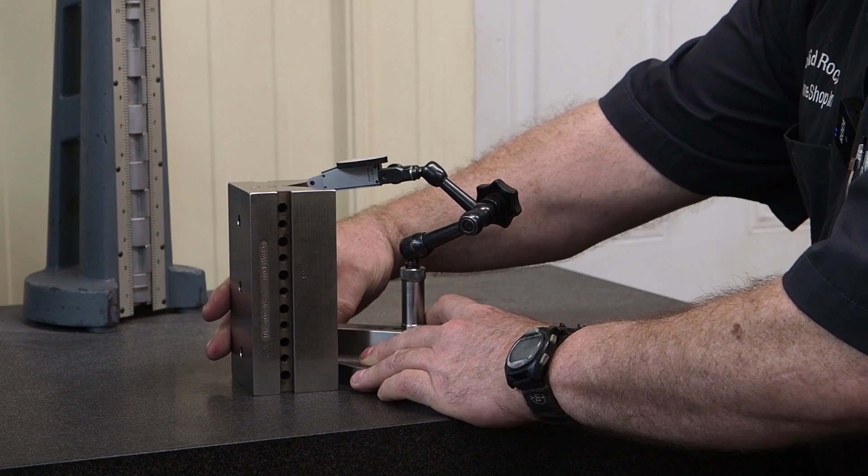And so one thing that's nice about this squareness checker, we have a small footprint on this radius. So it makes it easy when I want to check the squareness of a V. I can get in there and I can pivot and I can check the squareness of the V. Really nice. A lot of times when you have the squareness checker and you got the great big footprint, you can't fit in these small places. With these, it works real nice.